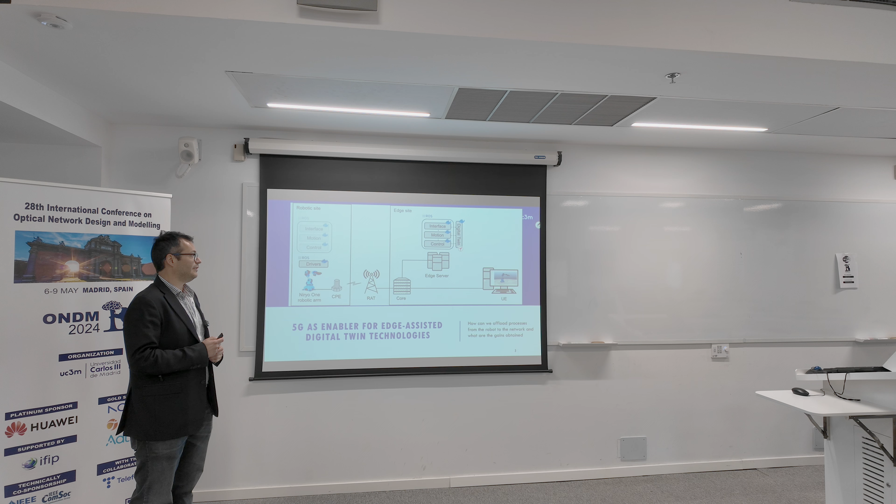So looking into this, let's focus on the first part, that is the connectivity technologies that are key in order to develop this connectivity scenario. And here we were looking at three main challenges. Basically, these challenges focus on how do we achieve this vision of the factory floor that is reconfigurable and is fully wireless.

So the first thing is how can we bring wireless into these robots? How can we take benefit of the wireless domain, and what are the things that we can do in wireless that we cannot do in wired technologies? Now, how can we achieve the real-time connection synchronization, and what is the penalty of paying in terms of energy of using the wireless communication for this scenario? And basically, how can we unify all of this in one digital twin of a robot that works wirelessly in the factory and can be controlled using a wireless connection, in this case 5G.

Then what we have done during this research basically is we have first investigated how to do this using the connectivity technologies that we have, what is the best option for the factory. Then we have designed and implemented an edge robotic digital twin, where we have basically a digital replica of a robot that is synchronized perfectly via the wireless domain with a robotic arm, and that we are able to operate remotely. And finally, we have evaluated the performance in order to understand where we are and what we can achieve.

So considering this, what have we developed? Well, the first thing that we did when developing this idea was we based our idea of edge robotics on the concept of functional split in 5G, which is a little bit weird. The functional split in 5G basically is how do we get a radio head, well, a gNB, a radio base station, and divide it into things that are computed in a centralized location and things that are distributed in the different antennas. This concept was applied to the robot.

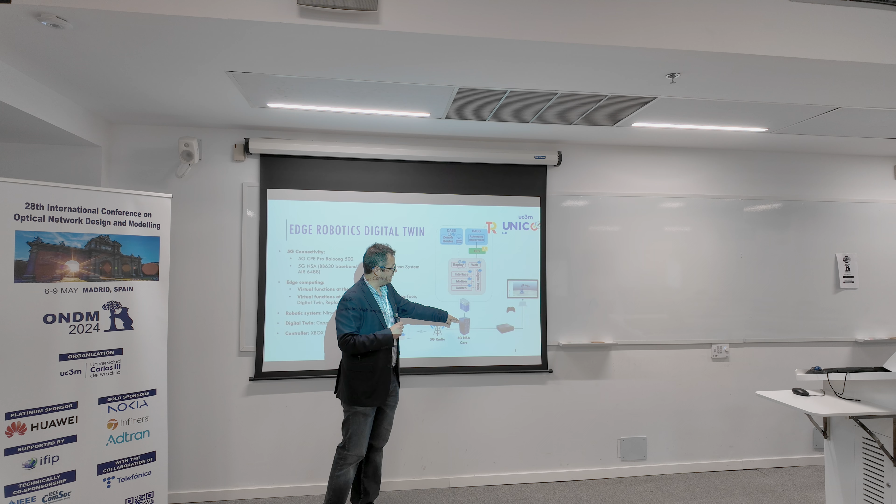How do we do it? Basically, we got the robot and we were analyzing the different software stack that was running in the robot, and we were measuring if we could move portions of this robotic stack into a centralized cloud server or edge server. In order to do that, basically what we did is we got the ROS protocol stack. We divided each of the functions into a Docker container, and we were checking if we could move all of that into an edge server that is in the core. In the core, of course, we are talking about a local core in the factory floor.

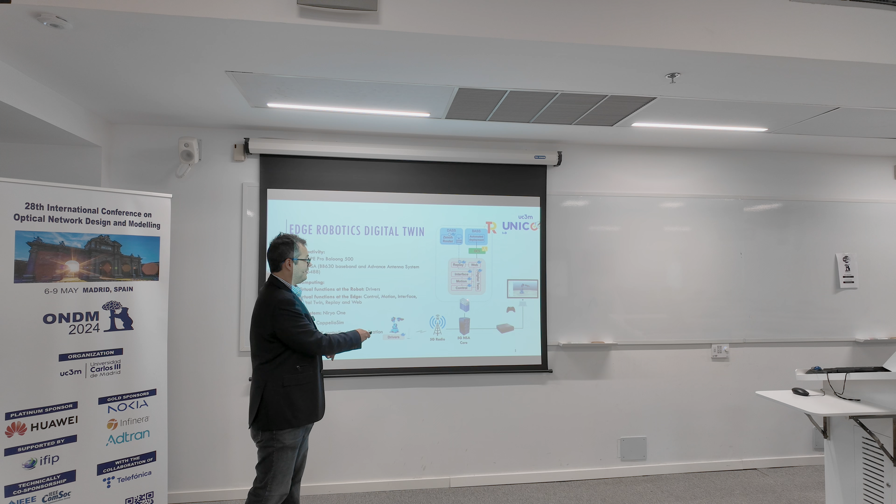In order to do this, what we did is, as explained in this figure, we took every part of the ROS modules, we Dockerized it, we placed everything in an edge server connected to a 5G NSA, connected to a radio, connected to the robot. And these are the different specifications that we use. Basically, for CPE, we use a Huawei one. We have an NSA network provided by Ericsson in 5TONIC.

And then in the robot, basically, what we were able to achieve is to take out all the control part of the robot, move it to the edge, and in the robot, just leave the drivers. So basically, we have a completely stupid robot in the factory that can be reprogrammed in a central location, changing whatever is needed very quickly in one place, coordinating a lot of different robots. And then we run that, and our robots do whatever we want.

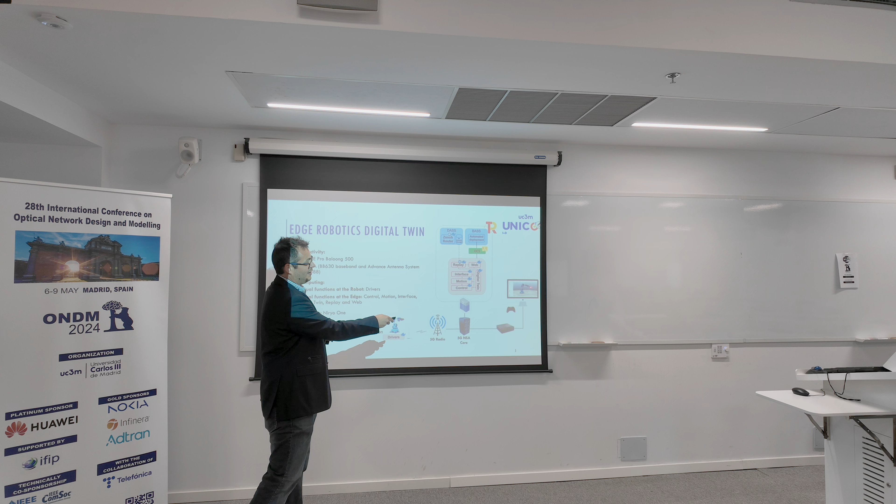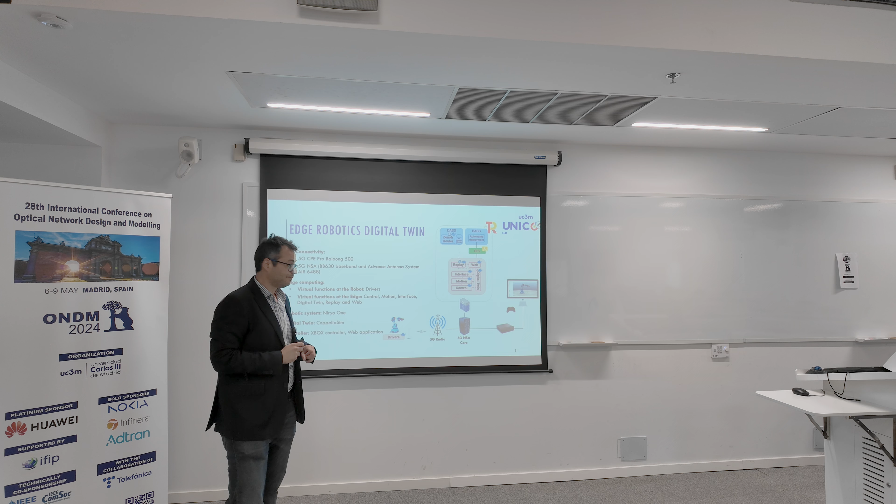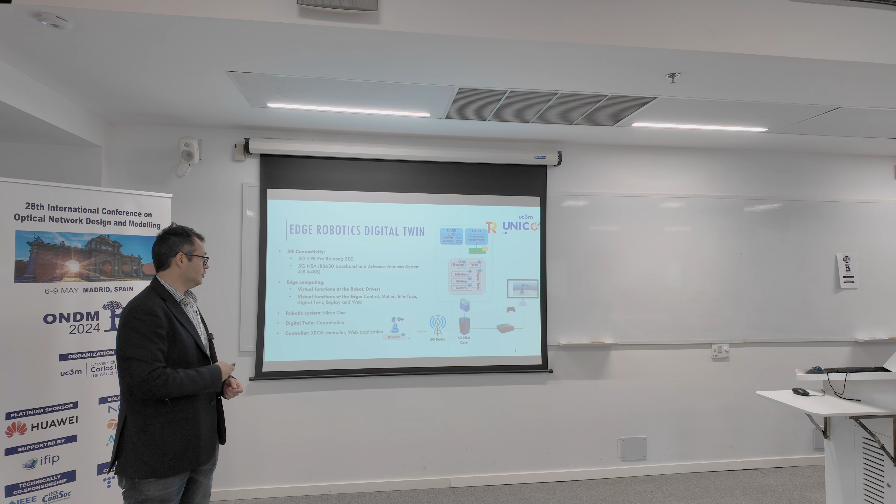And we have, on top of this, a digital twin that is this web here, okay? It's a digital twin connected to a web that is controlled remotely. So we have an operator that is able to do the movements that it wants in a digital twin, and this movement is replicated in real time in the factory floor. And finally, as digital twin, we use the CoppeliaSim 3D program, okay? And the Niryo one is our robot. Right now, we have developed this, and we have an evolution using a robot dog that is very nice, but it's not in this slide set, okay?

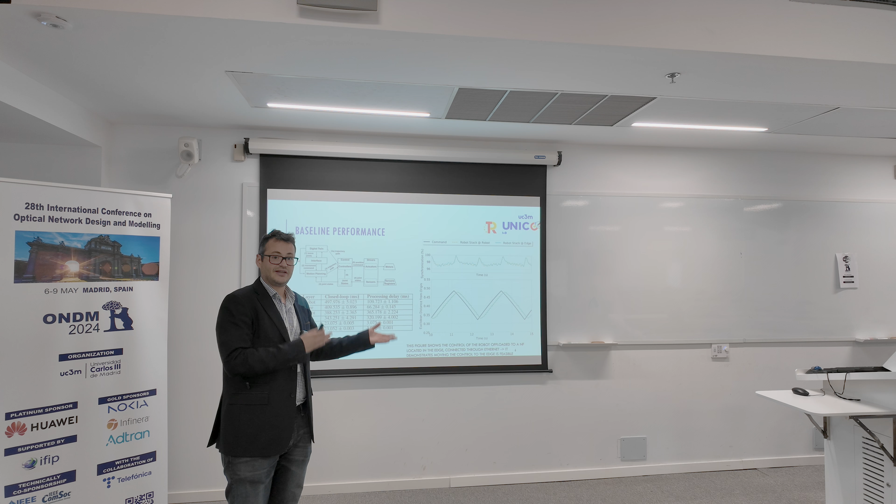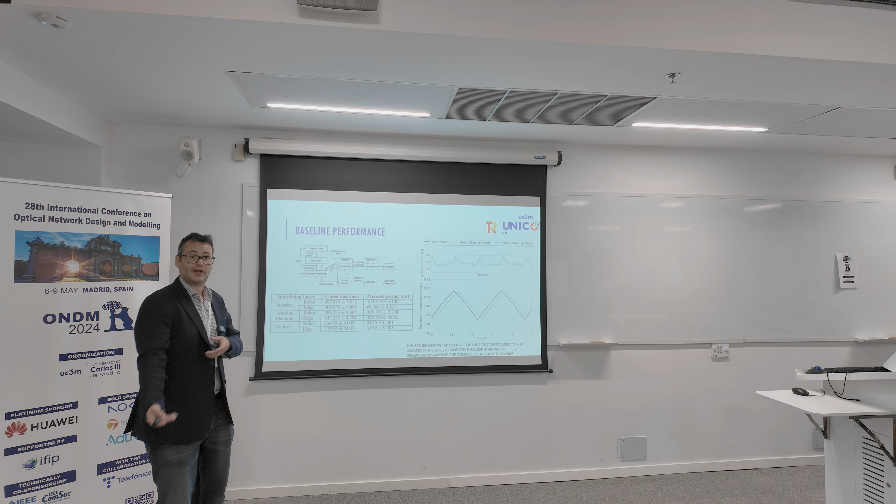So first things first, can we do this? Are we able to move all the intelligence of the robot to the edge and to control it without a loss of performance? The answer is yes, okay? So basically what we did is, this is the flow of functions that any movement of the robot has to do. So basically, the digital twin, we tell the interface, okay, I want to do this movement. The interface will talk to the motion planning. Is this movement possible? If yes, the motion planner will give you the set of coordinates that you have to execute. Then the motion planning will tell the robot, to the joint states, move. The sensors will detect the movement and will come back. And we will have a feedback loop, okay, in order to do that.

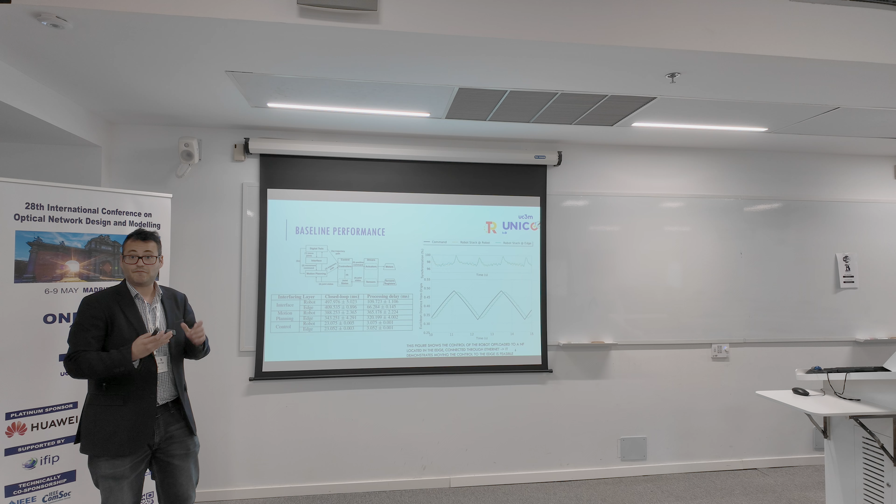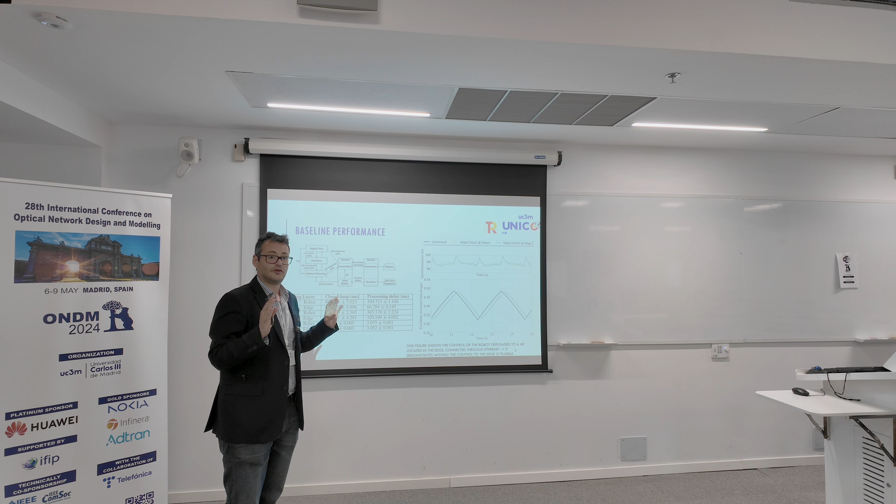Here, the first thing that we did is to measure the different times required in order to do this. You can see that for some operations, it's almost half a second, okay? So we have plenty of delay budget in order to work with. And basically, the green line here is when we put the control, we put everything but the drivers into the edge, and the black line is when everything is in the robot. They have a small delay, of course, you have to move the information to the server, but they are perfectly synchronized. So this is doable. We can move all the intelligence of a robot into an edge and operate it without any loss of performance. Okay?

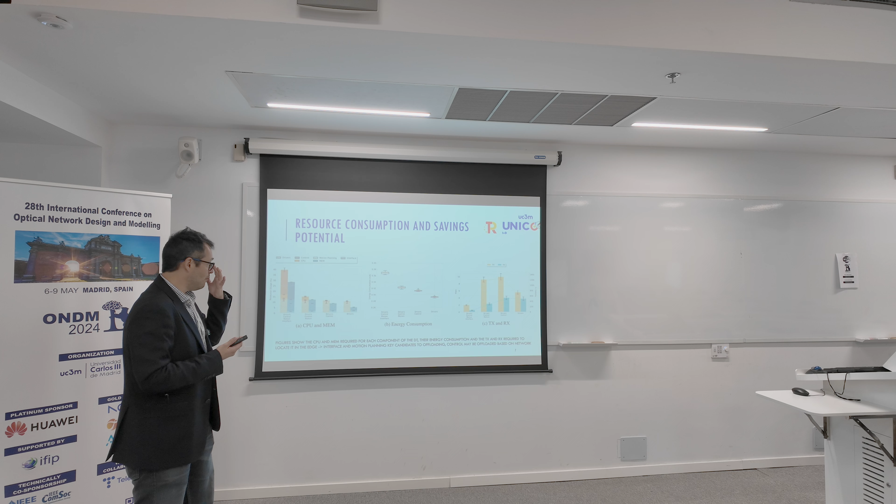Second question. Do we win or save something while doing that? CPU and memory, energy consumption, transmission and reception of data. In the first part, CPU and memory, if you analyze which parts of the drivers, control, motion and interfaces is taking the load, okay, you can see that basically the drivers are constant across all the different instances. So basically, here we have everything in the robot, here we have everything but the interface in the robot, here we have drivers and control in the robot, and here only the drivers, okay? So we can move a lot of computing power and memory and save a lot of resources if we move this from the robot to an edge server. And this will help us save money. Why? Because the robots will be less expensive. They don't need a powerful CPU, okay?

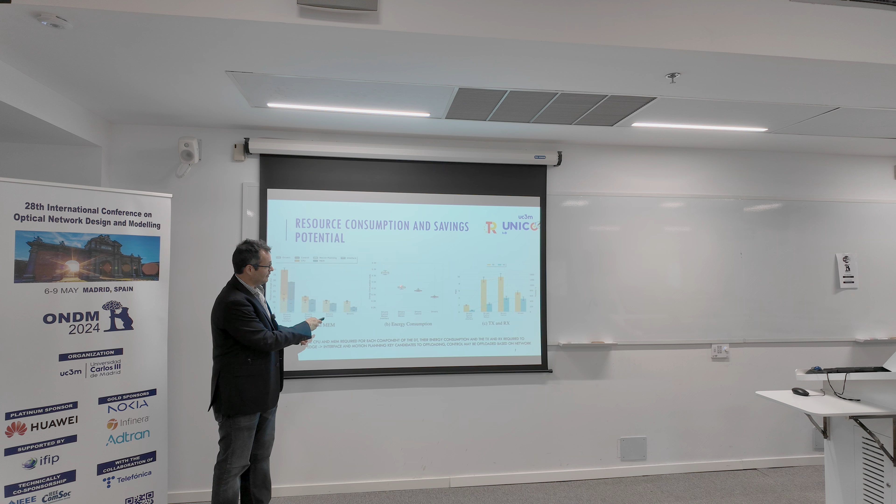In terms of energy consumption, doing the same exercise, basically we can see that if everything is placed in the robot it will consume a lot more than if not, okay? So we are saving energy doing this by concentrating everything in an edge server that in fact is prepared for this kind of workload, so it can be more efficient than having everything in the robots.

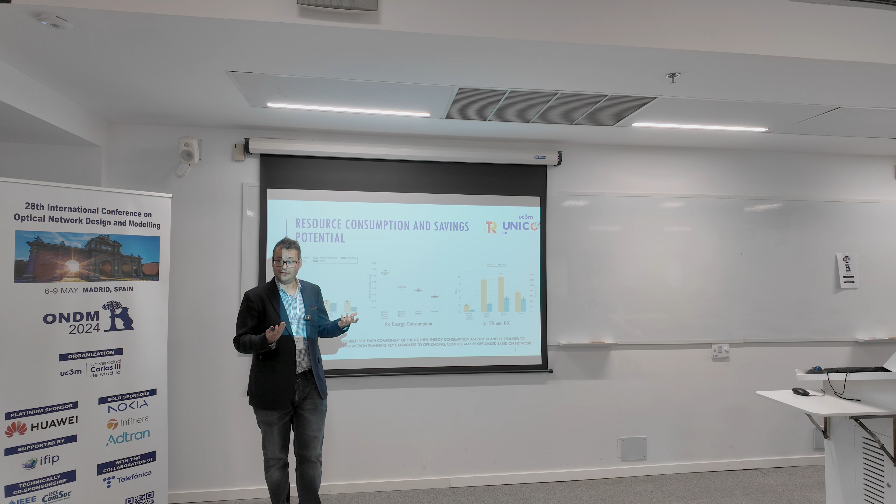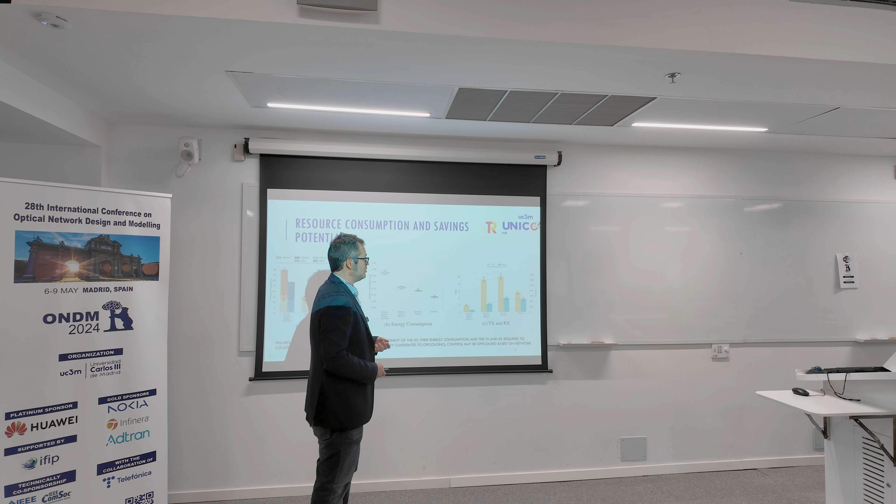And of course, in terms of transmission and reception, if we place everything in the data center and we are controlling the robot remotely, we have more transmission and reception. But the key thing here is that this part is pretty efficient. We have done our job in 5G and other technologies, and transmitting and receiving data is something that we do very well and very efficiently. So we don't save much in terms of data if we place everything in the robot.

Now, this is a very interesting slide. We know that via a wire, we can move everything to the edge, and it works without loss of performance. We know that we can save money if we move all the control to a server, because the robots will be cheaper. We know that we can save energy, because the centralization will consume in just one server, but each robot will consume less. The question is, which kind of technology can we use in order to do that? Because not all technologies are going to be able to support this data rate and this delay.

What we did is an analysis of Wi-Fi, 4G, and 5G NSA. In this case, the robot that we were using has a control loop of 20 milliseconds. This means that every 20 milliseconds we are receiving a command. And if you don't receive anything in 20 milliseconds, the robot will stop. Then you will need to wait for another 20 milliseconds in order to recover.

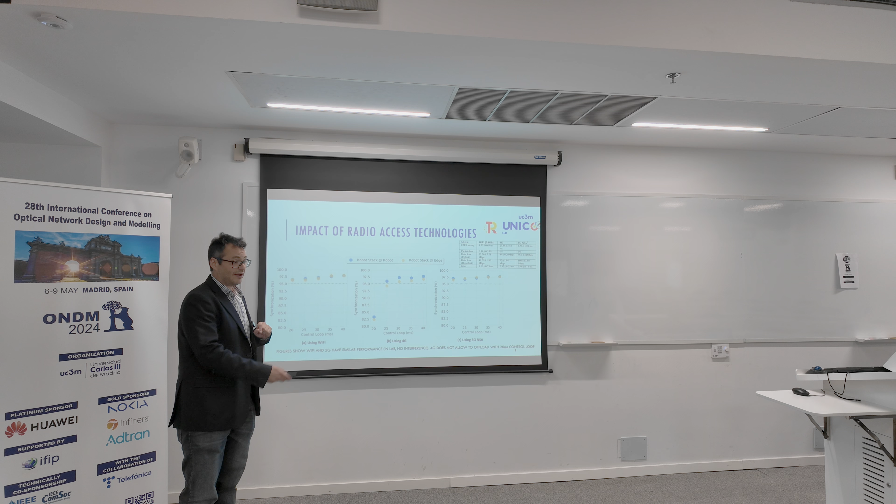So considering these 20 milliseconds, we can see that for 25, 30, 35, and 40, basically 4G will work, 5G of course works, Wi-Fi works, but for 20, 4G doesn't work. So for a 20 millisecond control loop, in 4G we cannot do this. We'll lose synchronicity and the robot doesn't operate as it should. So basically we need 5G, we will need 6G, we will need Wi-Fi 7 in order to run this.

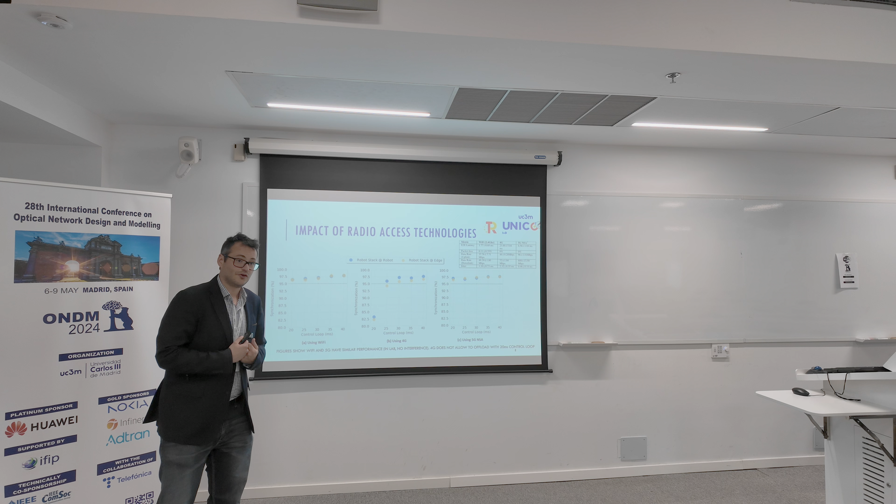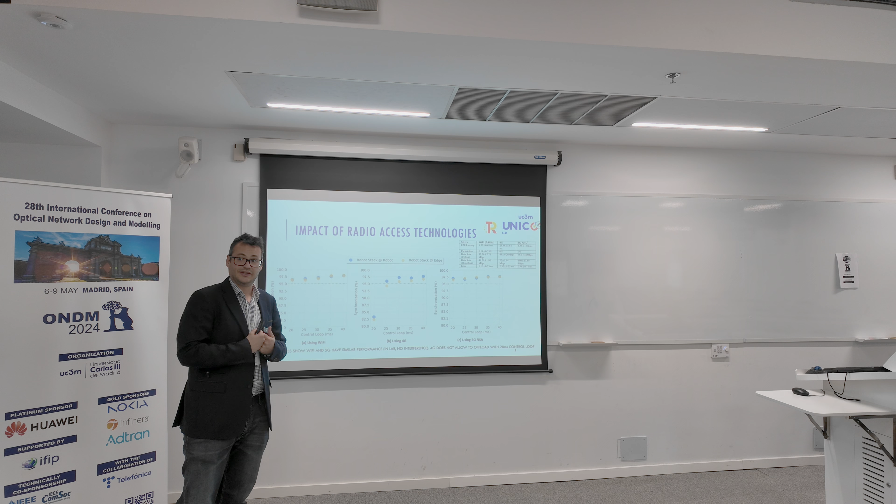Why am I saying this? Because 20 milliseconds is a research robot, not an industrial one. Industrial ones now can be 1 millisecond closed loop. For 1 millisecond, this will not be enough. So we will need 6G in order to operate this in a factory with the latest version of the robot, the newest one.

So with this, I conclude the first part of this presentation. Now let's have a look at how we can integrate this with artificial intelligence, and what are the benefits of doing so. Let me tell you the story of this. We were testing this robotic arm with Wi-Fi in a laboratory where we don't have any interference. And everything was wonderful, everything worked like a charm. We moved the robot to another lab where there are more people, more interference, and the robot broke.

At some point, the robot in one of the movements started operating in small jumps, and at some point one of the joints broke. Why? Because in the lab next door another guy was doing an experiment in Wi-Fi and was jamming the spectrum completely. So the packets were getting lost, and from time to time we were getting another one telling it to move very fast to the other side of the room. So the robot was doing like this, and the joint was broken.

So we decided that this is something that for sure we can remedy by forecasting what the next command is. And this is where all this work popped up. We started looking at: if we have AI and we know the different movements that we can do, maybe we can forecast the most probable command that you should receive. And in case there is a failure in the channel, you use that.

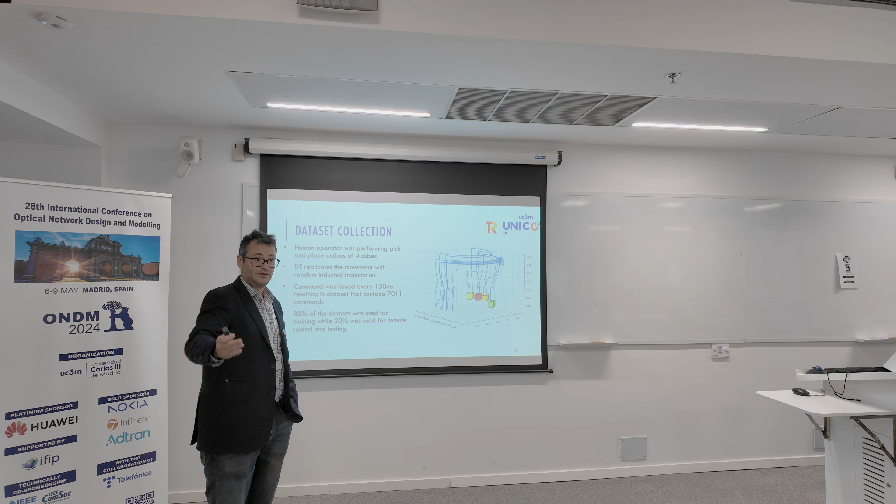One of the very nice things of having a digital twin is that you can use it in order to generate a lot of samples and train AI/ML models. As I have shown you in the first part of this presentation, we have a digital twin. We have a digital replica of our robotic arm. So what we did is program this digital replica and replicate it a lot of times. So we have something like 100 robots moving asynchronously, and we collected all these samples in a huge data set.

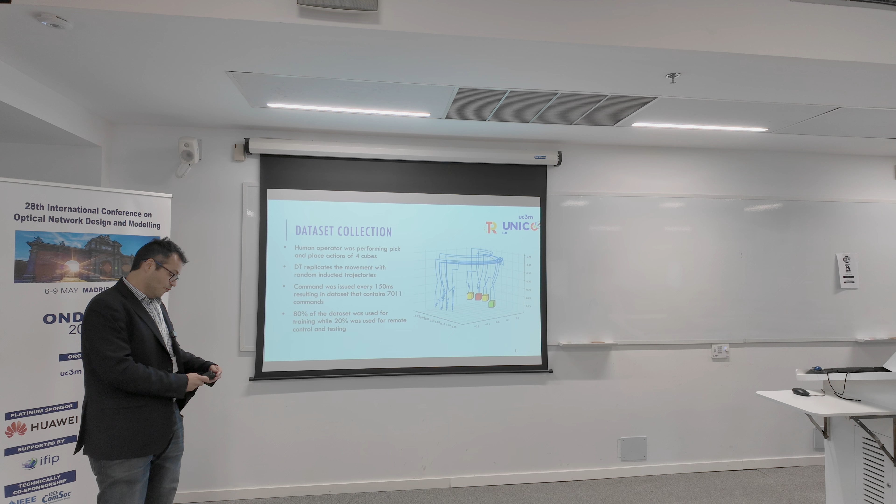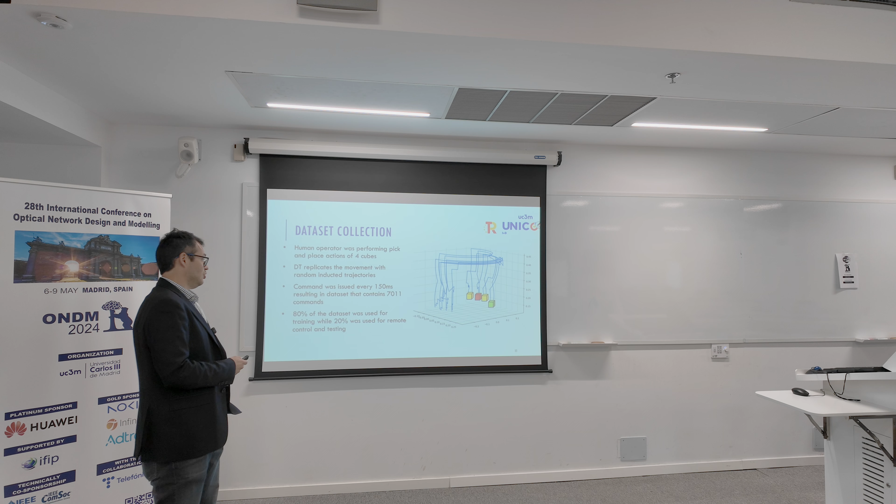So basically, we had all possible movements of the robot for the pick and place task that we wanted. With that, we train an AI model. As you can see, we have quite a lot of commands. We have different parts for validation, inference, training, and so on. So the typical model. With that, we train a model that we call FoReCo, that is forecasting, where we have these results.

Basically, here we have the trajectory that one of the axes of the robot should take when doing a pick and place. So you go up and then you go down. The red points are when we have jamming in the channel. So there are no commands arriving at the robot, and the robot doesn't know what to do. At some point you recover because the jamming has finished, and then you have to move very quickly to another position. And then it slowly recovers and goes to the defined trajectory.

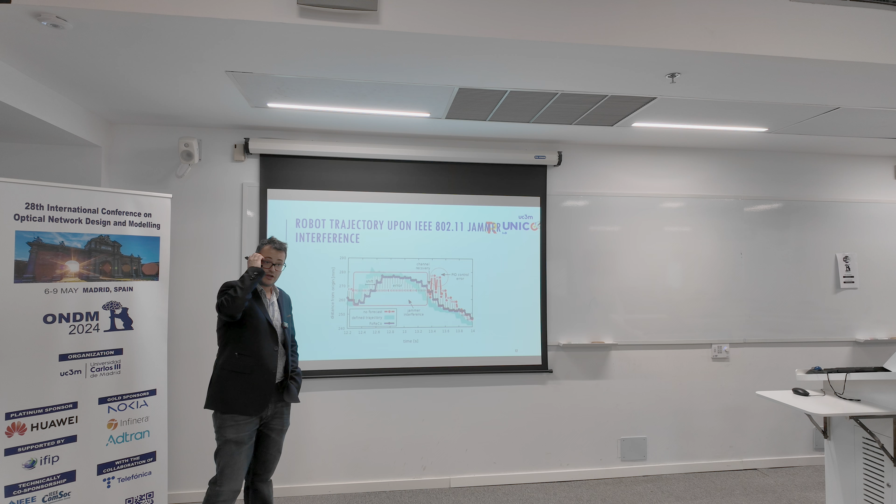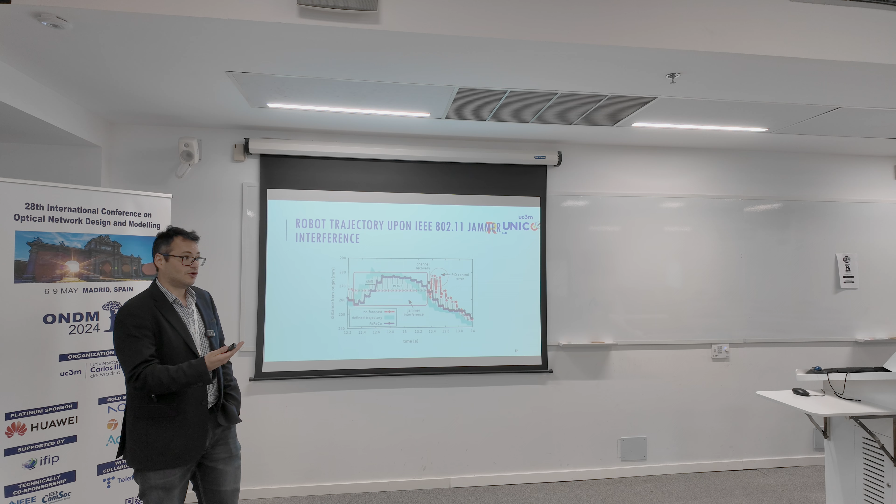And then we have FoReCo, our forecasting. As you can see, of course, there is a small delay, a shift in the operation, but it resembles a lot the defined trajectory that we wanted to have in the robot. So if you see the operation of the robot without FoReCo, the robot is really moving with small jumps. And with FoReCo, it's very much smoother, although of course there is room for improvement.

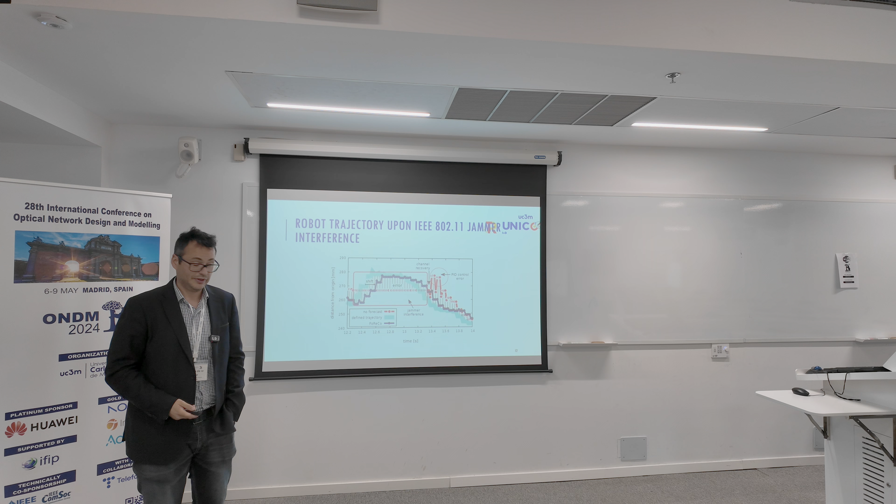Have you evaluated the impact of the AI in the robot? What do you mean? When you deploy the inference in the robot, that will have an energy impact there. We didn't, but it's running on a Raspberry Pi, so it doesn't cost very much.